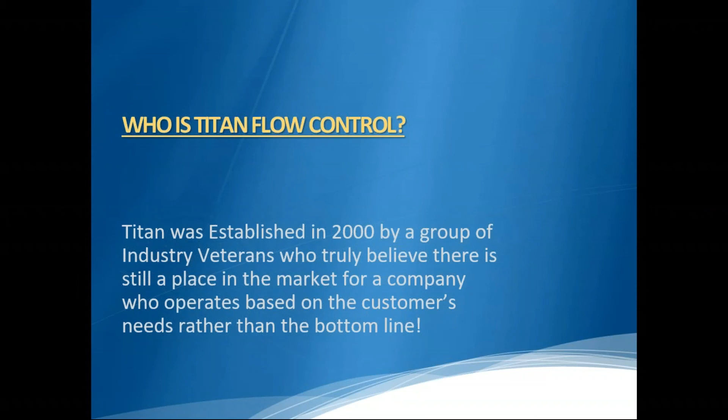So I kind of spoiled this one, but like I said, they're just a group of engineers and teams and service that have 20 plus years amongst them individually, 150 years combined, who decided to take a leap and go for their own road. They are considered a high-quality manufacturer. They do check valves, butterfly valves, pipeline strainers, fabricated products, and all sorts of fabricated and pipeline accessories. Their motto is they can fit and assist in any and all industries and markets, and where they can't, they can usually create the solution to get into that. So they're a good group to work with.

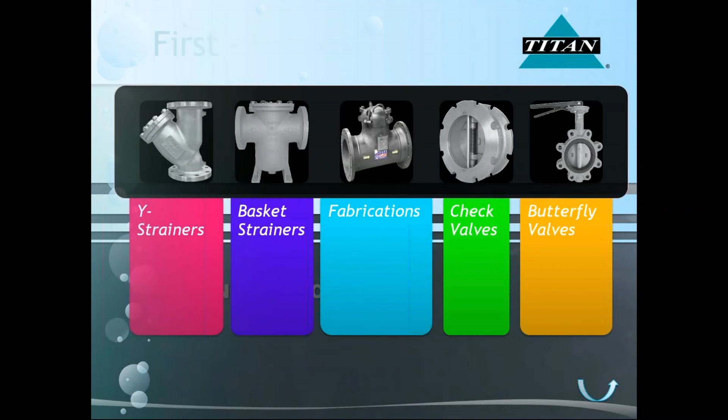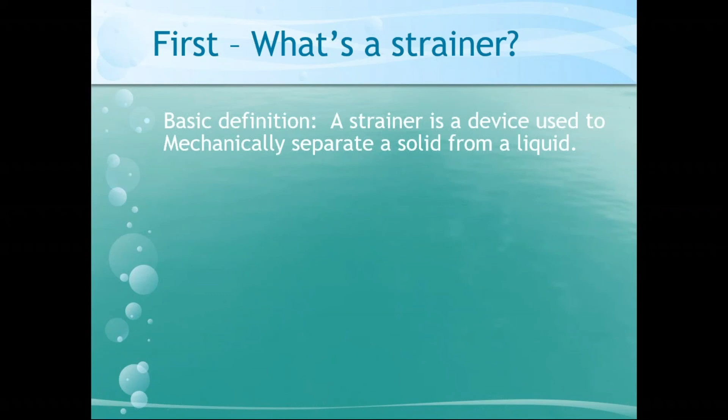That's their product line: Y strainers, basket, fab, check valves, and butterfly valves. We're going to start off with the basics. What is a strainer? A strainer, by basic definition, is a device used to mechanically separate a solid from a liquid. So you're catching particulate, debris matter, and containing it to a removable location. Now why this is important is, what's the difference between a strainer and a filter?

Titan does not do any sort of filtration, so they don't do filters. What it boils down to is the style of collection and the particulate size. Their cutoff point is 50 micron and larger is a strainer, which they can do with a Dutch weave and different kinds of baskets. Filters are 40 micron and smaller, and are a much different process of separating media from liquid. So Titan does not do filtration, and those lines clear themselves up when you see the design or the manufacturer. Sometimes there's a gray area, and we can offer a strainer with filtration capabilities, but they like to keep those ideas very separate because you're usually achieving a much different goal between straining and filtration.

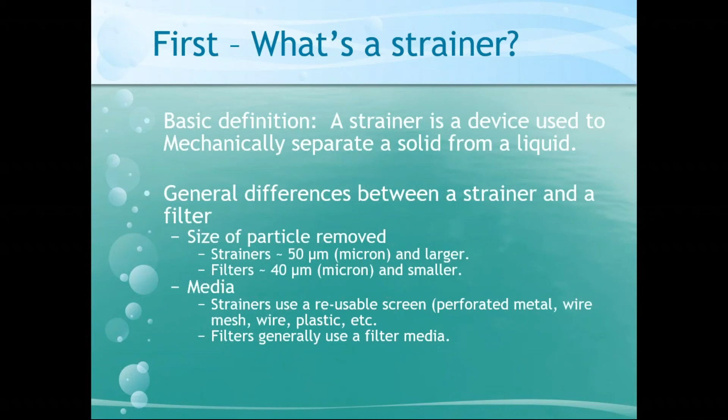So again, why so many types? Why so many types to strain media? What's different, what's unique? As we all know, unique solutions and problems all create themselves. So the straining market has evolved, so to speak, but also accommodated the many definitions.

The service solutions span anywhere from what you're trying to get out of the line, what space capabilities you have, what service time you have, what downtime capability you have. Each of these is a unique solution, a unique style, and carries its own benefits and limitations. So we're going to get a little bit of an overview on those.

One of the things on all strainers, they're all going to have a component where you can remove the straining component, the basket or the cone or whatever. So if you notice in all those pictures, it's some kind of flange or cover or something that...

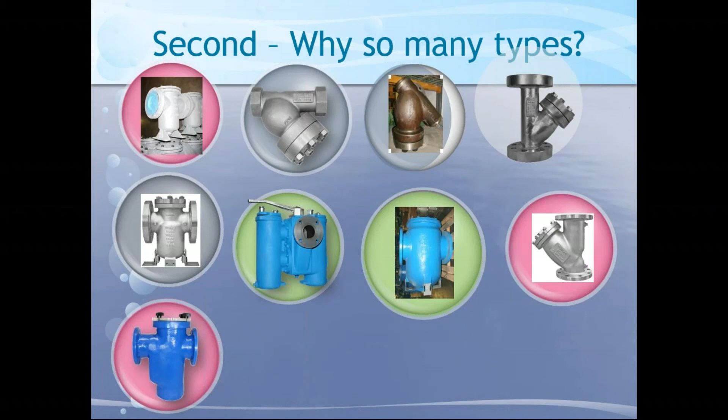So I'm going to talk about Y strainers. A Y strainer carries with it an installation benefit, one being horizontal or vertical installation, so it's more versatile in that department. It is serviced down, so it must point leg down, that's where the particulate heads down. You've got to catch it, or else it'll just keep flushing into your line. Then the blow down and the service is done from the downward position, so you take off the strainer and pull it out.

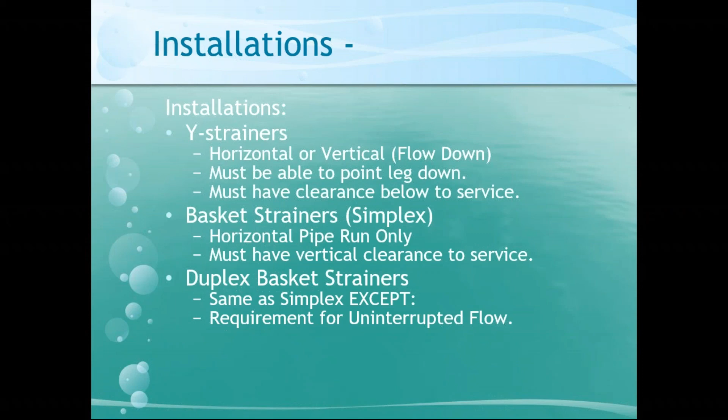Duplex strainers, I don't have one of those, but they're essentially the same as a simplex, only duo, and that's used when downtime is critical. You can shift gears and switch from one straining element to the next while the media is flowing. You have no downtime. You can service one basket, get it back in operation, and either go back to that basket or just switch them back and forth. No downtime, so that's what a duplex strainer is, just when downtime is critical. That's the application you're going to want to use.

The applications are limited, much like all pipe valve fittings, by pressure, temperature, and media. That's how we get to the most dialed-in design for what we're doing. Pressures and temperatures for the cast classes, like I said, it's 125 for the iron bodies, all the way up to 2,500 for the cast carbon and exotic. Well, no exotics for Y strainers.

Fabricated basket strainers are designed per application, and that's where they get a little flexibility. We can go up to, I believe, class 900 on fabricated basket strainers. Those are done in-house at Titan, they have a massive fabrication facility.

That's when, if you need a different design or a quick closing feature, they have standards, but they have fabricating capabilities, and they can only fabricate a simplex basket strainer, just because of the way the pipe is. For a cast unit, they just don't have the capabilities to do any modifications outside of an extra port or something like that.

So simplex is used when the alloys are more demanding, service conditions are more demanding, and the ANSI class is higher. That's where we get into the fabricated market, and that's what Titan is really hanging their hat on recently, investing significantly into their fabricated designs.

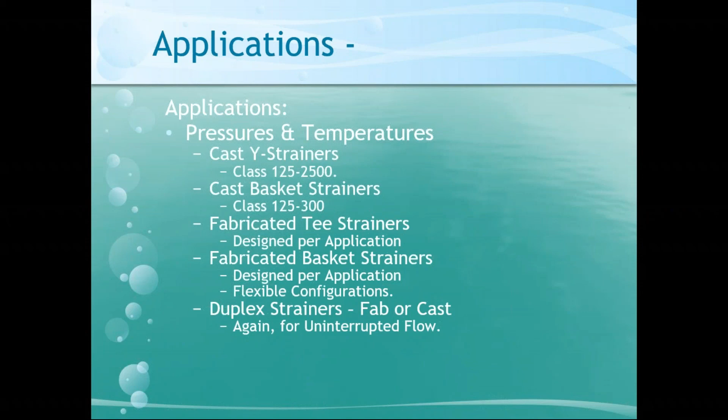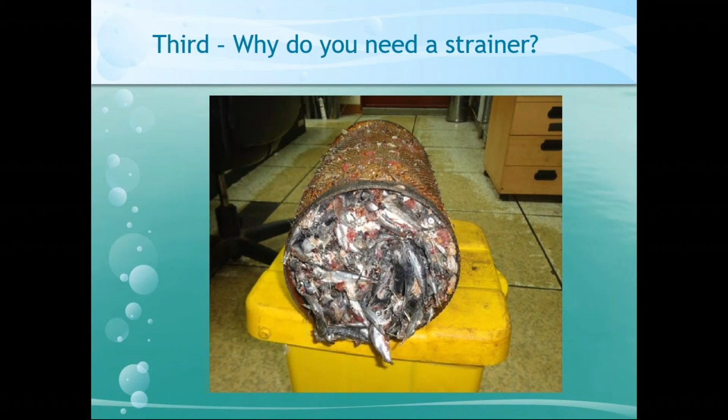Once you make that initial investment to get a straining element inside the line, you're kind of just looking at replacing the baskets and screens going forward. I think the insurance policy way to think about it, and it's the best description I've heard, is that it's a low-cost insurance policy for your line, protecting that much more valuable equipment.

So, cast strainers. I'm going to go past that one, this is more design. The product mix and size standard goes all the way down from 1/4 inch up to 36 inch. Your classic end connections are flanged, thread end, socket weld, butt weld, solder, and groove. The groove is the most recent, they just came out with that.

So it's in cast only right now, cast iron groove end, 125, 150, all the way up to 2,500. The materials are cast iron, ductile, carbon steel, stainless. That's where the Y strainer will stop, at stainless steel.

Now exotic alloys, that's where simplex kicks in - duplex stainless, super duplex, exotic alloys, chrome moly, alloy 20, Monel. A lot of that stuff they stock in-house, but once it becomes too exotic, it's sourced. But they have done it all and can do it all. They source it and keep it in-house.

Same with screens, they can do the same thing for temperature. They can do it all across the board. So exotic alloys is another situation where you'd switch to simplex when the alloys are more demanding.

We're going to switch to a simplex. Screen 25 micron, they're going to do that with a Dutch weave. It's a perforated screen with kind of a suit of armor, a little mesh lining weaved into it. 20 mesh, your standard mesh, all the way up to 1 inch perforated screen. Cover designs: bolted, clamp, T-bolt, and threaded.

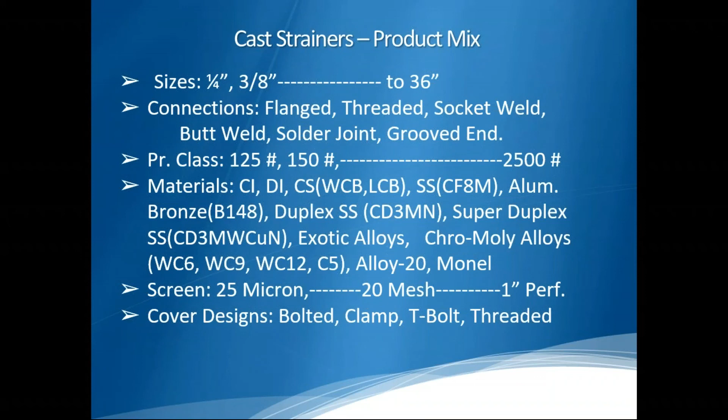All right, and now just a little more in depth on our cast - this is our size ranges. As the class increases, the size decreases, just based on service and material capability requirements.

They do have RTJ flanges, they can do that in-house, they can swap out flanges. And smaller size, half to 3 inch - socket weld, butt weld, thread-in - all standard stock items for Titan. So if you can't find it in one end, they can usually throw you an option and get it out there. And if it's capable and possible, they'll absolutely fabricate in-house to do what you need.

Titan is, hopefully I'll keep repeating this because it's true, Titan is the most user-friendly. You're talking to a person, you're getting a real answer, yes or no. That's one thing we love about Titan - you're talking to the fab designers in real time and they'll get you done. They try to make it as user-friendly as possible. They live by the 'customer is king' motto, and for the 7 years I've been working with them, they've never let me down on that. So hopefully that gets repeated.

Yeah, then those are for everybody. Okay, if you just talk about - I want to make sure. Yeah, no, it's enough for everybody. Okay, yeah, thank you. No problem.

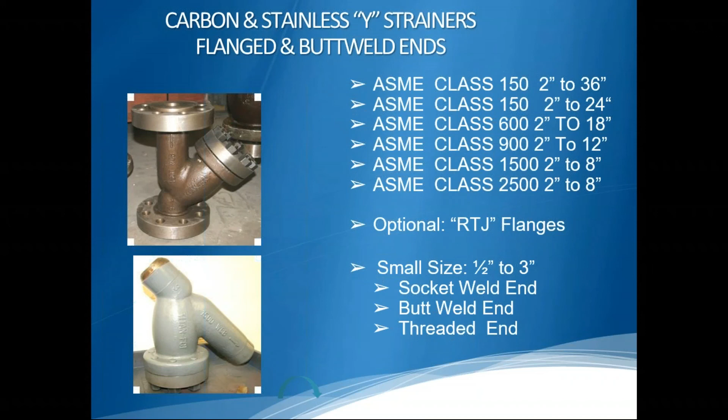Trevor, okay. All right, so moving on, they follow all the industry standards. They are getting a little bit into the bronze and aluminum bronze alloys. They do have a standard lead-free aluminum bronze now, so they're getting into that market.

So I'm going to take a 2-minute break. Yeah, I want to get a break - burrito break, go ahead. Burritos are the most focus for it, so I want you to be able to concentrate. Jay, you got to go get one now. You were talking about that. I'll grab that once.

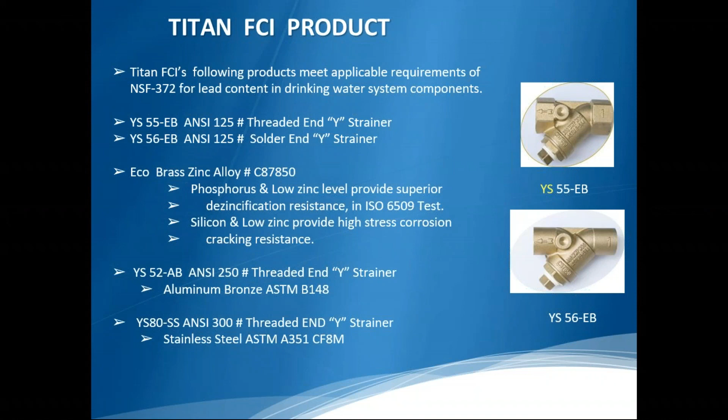But again, like we always say, with the price, connecting with labor - the significant amount of labor saved with those quick acting covers, especially the ones with davits. Single person maintenance goes a long way. Drainage vents are... oh, go ahead.

Oh yeah, so a davit wouldn't hold much purpose on one like this - that's a 4-inch. It kind of has with these. Anything over 4-inch will come standard with these. So both in - now when you're getting to a 10-inch simplex strainer, it probably sits about yay high with a cover about there. So what a davit would be is it mounts on the side here, and it just acts as a davit lifting arm.

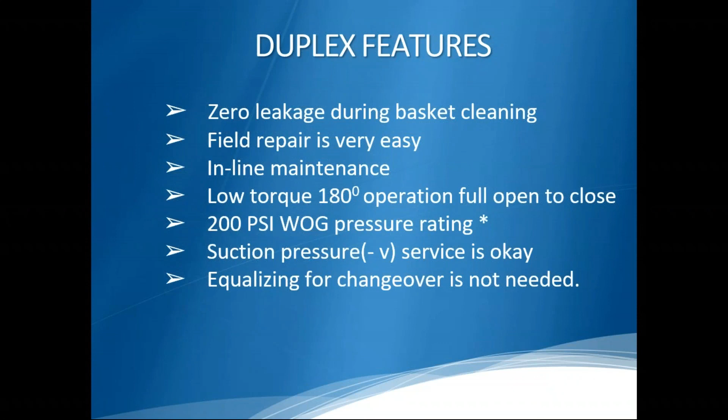And they kind of have a unique thing when they say, is there any expediting fees or something? They truly jump ball it to their crew. Does anyone want to stay tonight and get the expediting fee? And they do it. So if you've got a real unique one, or you've got something real hot that has to happen, it happens a lot with these.

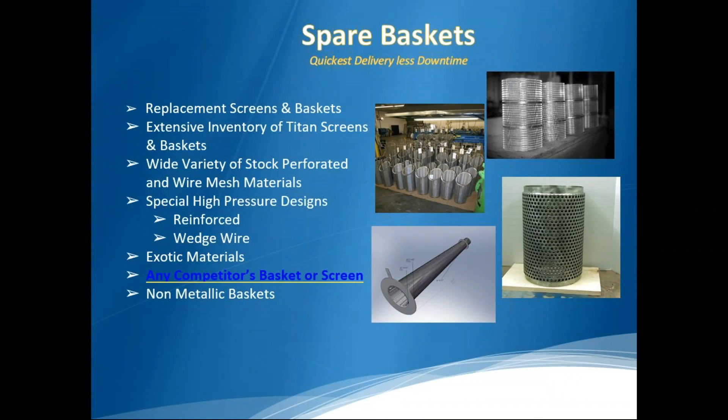So not necessarily a spare basket, just because they're ready. I mean, they're putting these in 500 times a day. They're ready for the screens and the straining elements. But it does happen if you need a Dutch weave or a full 3/16 stainless, you'll need something. But what we do get is the expediting fees a lot with this. These are done in-house. They also have an affiliate in Houston that does these. So these can come out real quick. That's where you'll see more of the expediting fees.

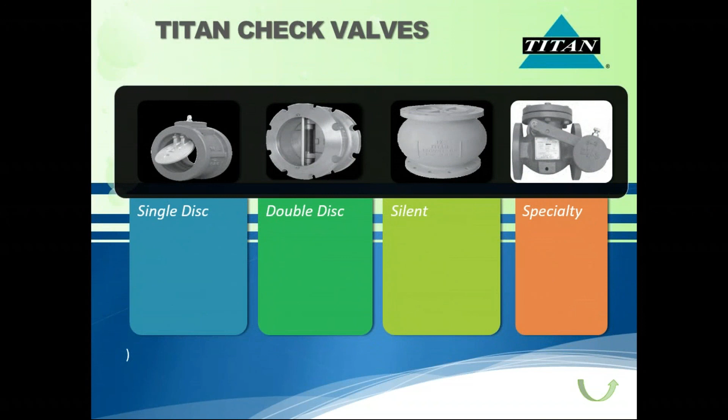All right, so now we're going to get into the check valve world. They've got a single disc design, double disc design, silent style, and then specialty. We'll give them a roll.

So single disc design, I don't have a single. I'm going to have a new kind of style one, but that's not a true single disc. So single disc design, biggest feature on that is lay length, slides right in, single disc. So your space is remarkably low on that. They offer this one in carbon and stainless. It's like the CS12. It's an extremely thin pattern, but it is full opening.

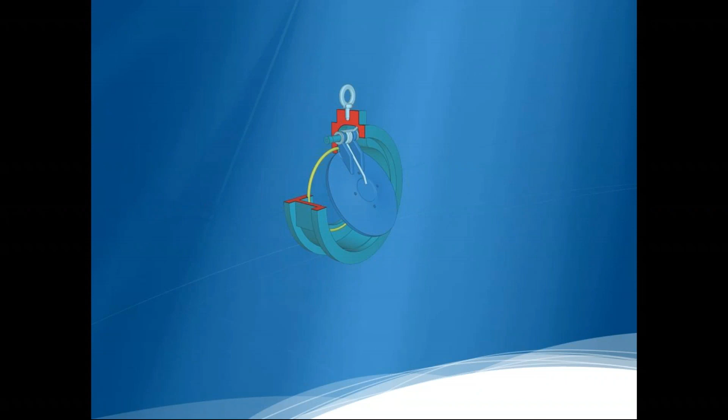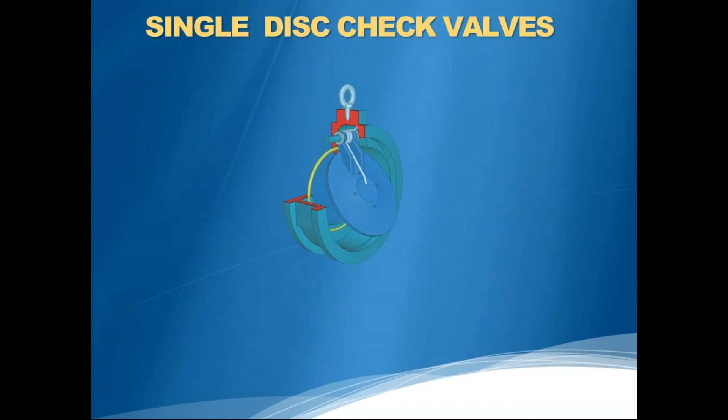And then they'll also have an iron. That's like a depiction of the iron body, and it's a little larger. It'll still have a smaller space design than this, but it kind of fits the same lay length. So they have an option for a true, I need the smallest valve to reduce my length, I need to replace an existing with a single disc. They kind of married both worlds on that, which is good. Advantages of a single disc style is that it is full opening. Give me a tap on that one.

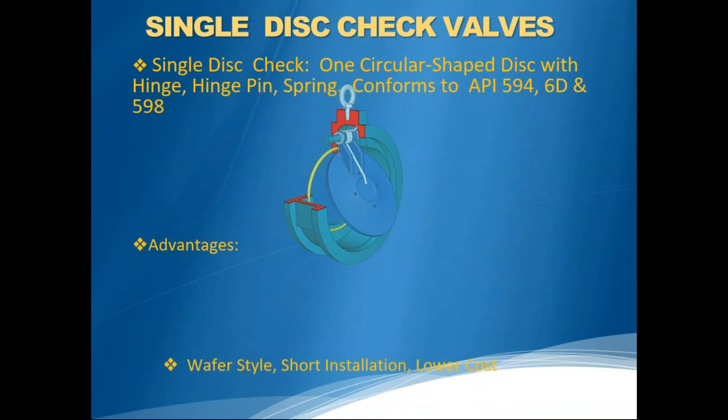So, single circular shape, hinge pin, conforms to API 594, 6D, and 598. It's kind of the lowest velocity design, they say. The cracking pressure with the spring makes it the easiest to pop in and out.

The disadvantage of this would be just the flap. It's a classic flapper, so if it's low pressure and constant, you'll get the most chatter on this one, so you need to assess the flow velocity because oscillations can exist.

Inline maintenance is not possible. With that design being a single unit, it can't peek in, it can become foul, and you've got to take it out. Most of the time you're just going to replace it. So it's low cost, low material, but with that comes limitations, which is serviceability.

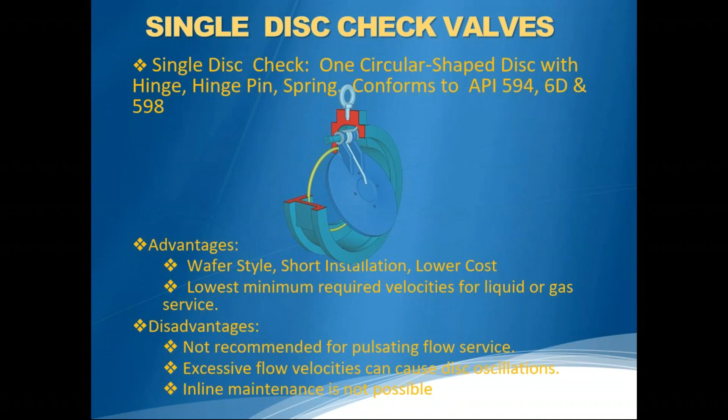One more step on that. Then there's the dual disc design, what they call the double disc. This is probably, I don't want to use the word common, but if there was a common one, this would be it. It also conforms to 598, and it's a wafer design, so short installation, easy to install.

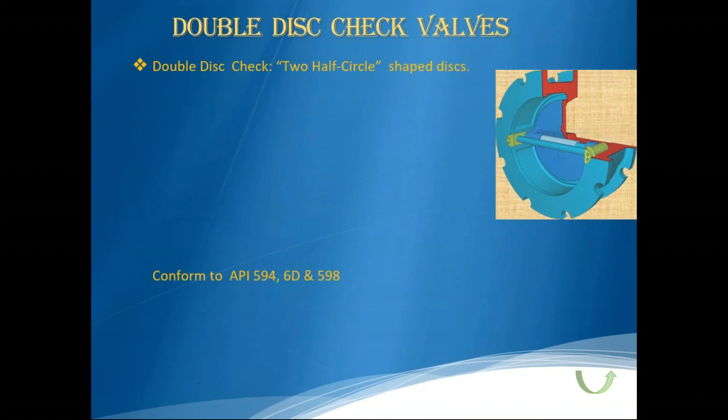You know, with wafers right in. But the disadvantage of this, you'll also find the chatter. With all check valves, you're limited on sizing from your pump, so the chatter is whether you're going to get the most. It has a higher cracking pressure. Standard on these is half pound, and it goes in and out.

But one of the bigger limitations on this is the fact that it does have quite a bit of interference with the line. So if you've got heavy debris in your line, you can use a strainer - it is going to catch. You don't want to use it for slurries, wastewater, anything with heavy traffic, because this will become foul very, very easily. So that's the main thing to watch out for.

Same thing with all check valves or the flapper design is the oscillation. If you have high oscillation in the line, it's going to be a loud chattering check, so just keep an eye out for that.

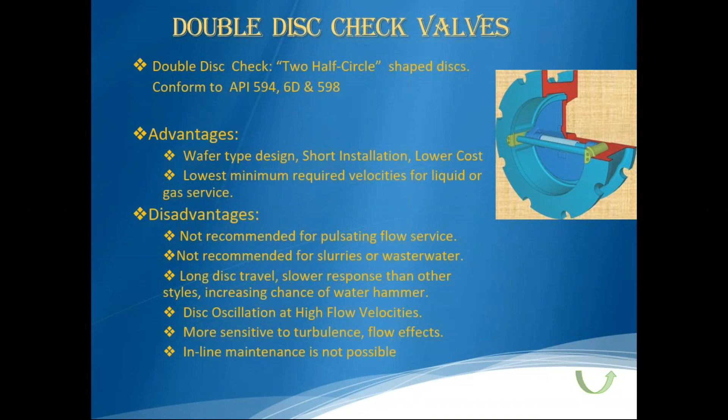And then center guided silent check valves. This is center guided - not the globe style, but it is a center guided design. Single spring assist, kind of in and out, so it's a more uniform flow. These will create a more uniform flow - water can't find kind of a secret path and then abuse one side or the other. So it's a single disc design with uniform flow.

The globe design has straightening vanes, so it'll reduce turbulence in the line. That's where these will come in - if turbulence is higher, you want to look for a silent style single disc design. Keeps a more orderly flow.

You're going to run into the same limitations as any inline check valve of this nature - debris will foul up your line immediately. So just keep it clean with a strainer, but this will reduce turbulence and chatter. They have two designs, one of which is a bigger globe style with straightening vanes, which is a true solution for a heavy turbulent line, for use in pumps and high slurries and anything that'll foul up the line.

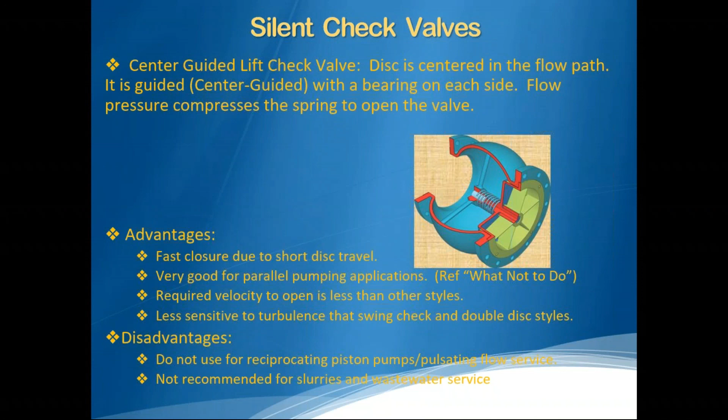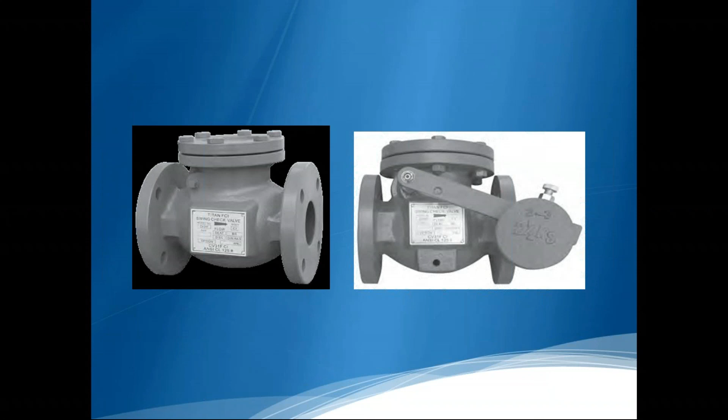Specialty check valve - this is a lever and weight design they offer, or just your standard inline check valve. This is when maintenance is important, so you get inline serviceability. It is a top entry design - you lift it up, defoul the disc, and get back on your way.

Limitations are the same as the single disc design - it will chatter, no turbulence, not too close to a pump. But this one is ideal if longevity and serviceability are important. If you do have a heavy debris line, you can take a peek in, defoul it, get a replacement disc for it, and kind of move about your merry way.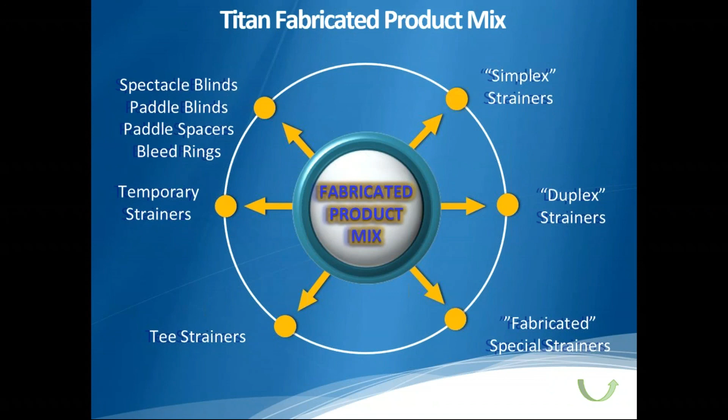So now we'll get into these. We're sending you guys a literature box — it's in the works, and it'll have nice breakdowns of all this stuff, ordering codes, and general ideas on what they can do. This covers all their capabilities, and it's increasing every day.

I won't go through all these, but like I was talking about, they've got plasma cutters, water jet cutters, plate shears, power saws. They invest heavily and constantly in the fabrication design, so it is a beautiful facility.

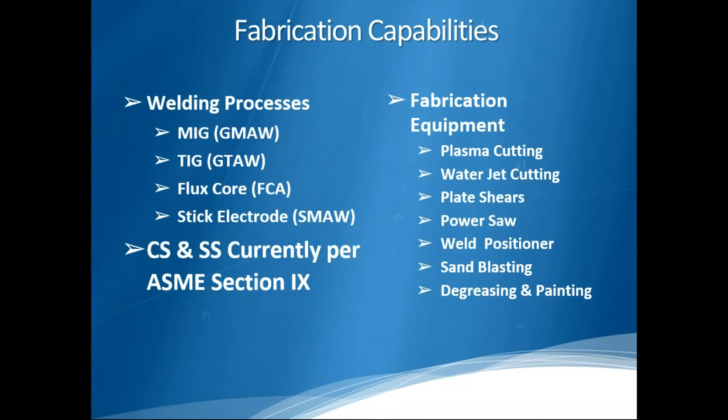If you lose a bid because a U-stamp was required — kind of like API 6D on valves, some people conform to or test to, while others have a true monogram — they used to just conform to the U-stamp, but now they can do it in-house, including radiography. They really listen, and it's tangible: if you miss a bid on a spec, they don't take it lightly, they look to do it in-house.

So that's where all the testing, they can do it in-house. They've got in-house testing facilities, so they can hydro test real time inside their facility. They've also got a paint shop, with painting standards and customer specifications. If there's a specific paint spec, you can physically send them the paint, or provide them with resources to source the specific things, and they can do that.

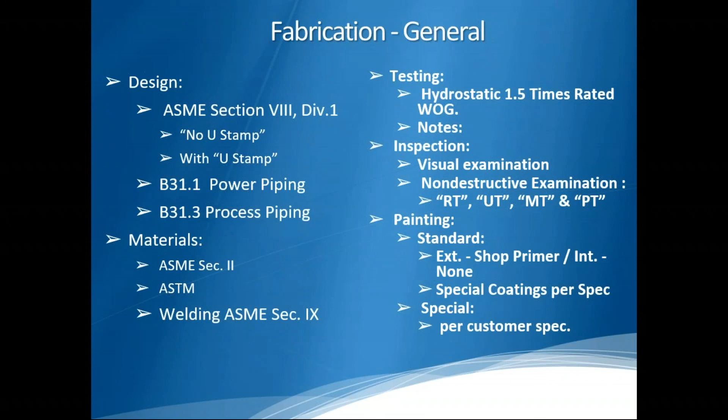All right, so just a breakdown of their fabricated product mix. The size range is the same, but the products they can go up to 36 inches differs. When we're talking fabricated strainers, it's simplex only — there's no fabrication available for a duplex strainer, but they can do 2 to 36 inches. They can in-house do all the end connections, flange, butt weld, 150 to 900, which is where the limitations of off-the-shelf cast, class 300 to 900, come in. 20 mesh, 1 perf, that's the same.

Cover designs — this is where you can do any cover to any design. They can modify a strainer or build it from the ground up. They can build a 100% domestic simplex strainer, sourcing all domestic materials. A lot of the castings are import, but they can conform to Buy American, or do 100% domestic simplex strainers. That has saved us quite a few times. And there's a different quick opening design — there will be a picture of that in a slide or two.

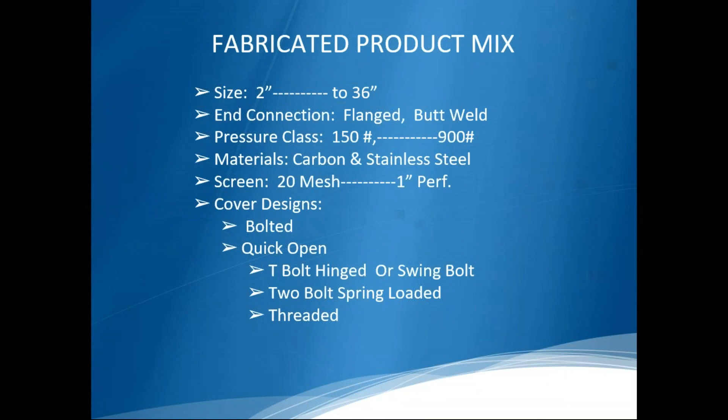Some of that is accommodated by having a knob lever, which will open all of them simultaneously. So like I said, when we say limitation, it's mostly an out-of-the-box limitation. We can accommodate and facilitate up to a true ANSI rating if needed, but it costs a lot more money — and if it's not needed, we just make sure to note it with an asterisk.

200-pound pressure rate, that's a nice example — that's their fab, completely built in-house. When I was there one time, I saw some 24-inch units made to the customer spec. So any engineering deviations, any design, they can do it.

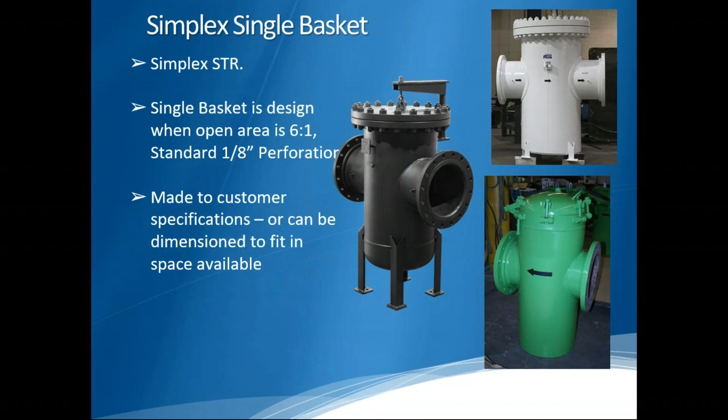Multi-basket design. Sometimes this can be done as a simplex off the shelf, and they can just modify it.

Why multi-basket design? It increases the open area and increases the flow, so water can freely flow through all of these chambers, depending on the engineering breakdown and the pressure drop. If calculated pressure drop is too high on a simplex design, just because of the amount of open area the water can travel through, they came up with a multi-basket design, which allows for higher flow of water and can decrease that pressure drop.

When we say pressure drop, they've got a very basic breakdown on their website where you put in basic info, what size, what straining element, and the media, and do a quick calculation. It'll tell you 2 pounds or lower if you're good to go. If you see a spike in that, that's where we might want to get engineering in to truly look at some viscosity, but a multi-basket design is usually a good method for alleviating pressure drop.

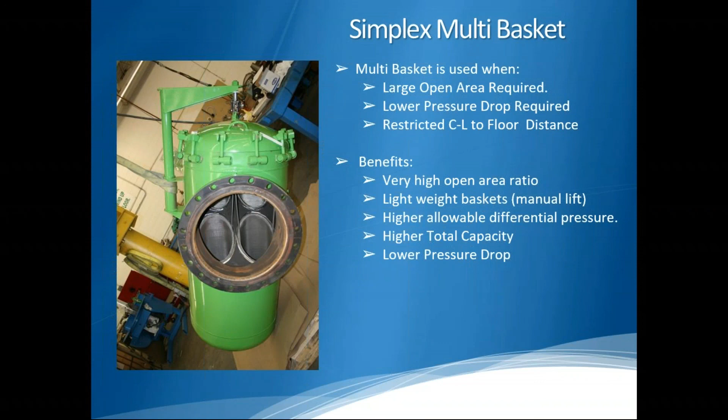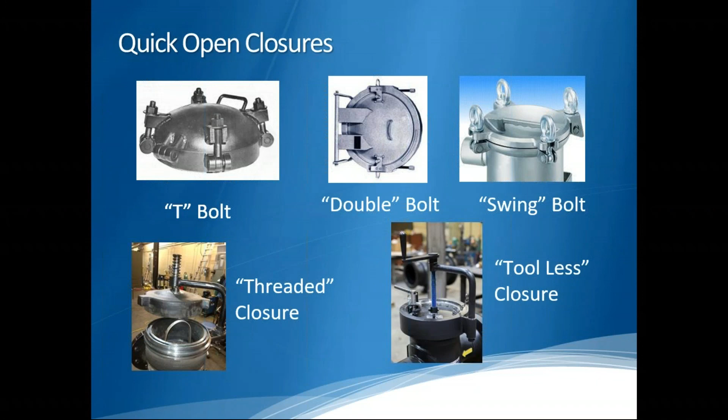This is a good example of what we've been talking about over and over—it's just a different style of closing. This is their fab facility, so they can modify it. Dead horse at this point, but they don't stop—they know, and then get into the fab T design.

These are more engineering driven: bolted cover, quick opening, flanged in with a tub basket, and then W basket. That's where they'll give you a design on straining style, and usually that's all dictated by the engineering design.

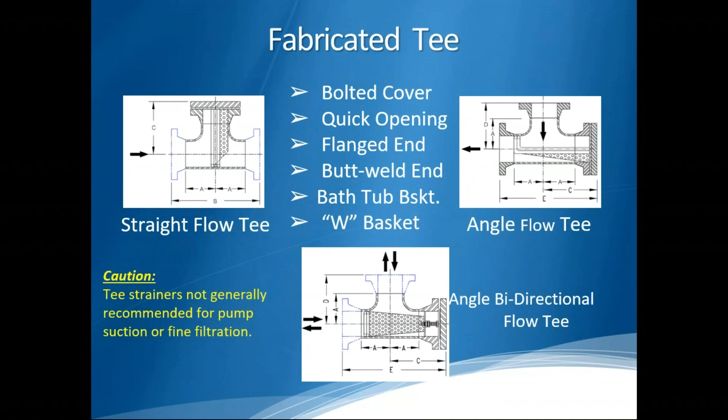With fab Ts, we're always kind of replacing someone else's, and they've done well with it. I've never organically specified a fab T—they kind of come to us or come to Titan, but they can do it, and they go by the design standards.

These are their fabricated duplex—these are butterflies. They've got a quad ball on the lower end, but I think it's 8 inch and above they move to a butterfly design, depending on the material, either an iron body butterfly or a high performance butterfly if needed. This is a completely built, ground up, 100% domestic valve. So they will do that.

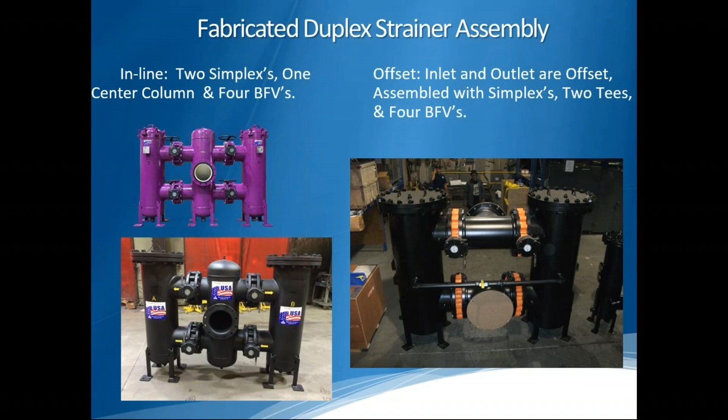And then temp strainers—that's the most common, the witch's hat or pilgrim's hat, flat style, spectacle blinds, spacer rings, bleed rings. We've got a nice catalog we're sending on this.

They can do 150 to 1500 on all sizes. It's in-house made. Usual lead time on this is 4 to 5 business days. Expediting is available, but that's pending the available labor, and it's usually their quick thing is double the price for half the lead, simply because they're truly keeping the team extra to get something out next day. It's worked wonders before if someone's got to have it the next day.

So these are used for temporary installs, catching the startup, just in and out. Like I said, we've got good literature on that. These are all done in-house—these are considered domestic because they fabricate these in-house.

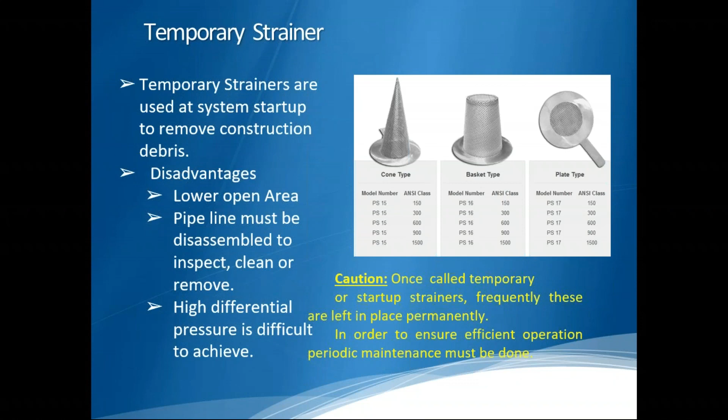Well, it all depends. All fabrication is considered domestic just because it's done there. They fabricate all of their baskets and screens in-house, but the castings are Chinese. But Titan can conform to Buy American 51% on just about everything, simply because if we needed to make this Buy American compliant, there's domestic—we can do NACE certified domestic trim. The gaskets are made in-house, the basket's made in-house, the testing is done in-house, so the labor and parts get there.

And they have a nice little certification letter. I don't know of anything that's exempt from that we can't do, just for the simple fact that they can fabricate all of the internals and test in-house. So the labor usually is what puts it over that 51% mark.

And then on the true 100% designs, they can do that as well—these would qualify as 100%, especially sourced. If it gets down to the nitty-gritty on a true 100%, they will have to do domestic sourcing of carbon and stainless steel, which they can do, but they do have carbon and stainless blinds that are import.

So with all kind of the Buy American stuff, they can do it—you just got to know exactly which one we're doing. The 51% one is never an issue, just because of the amount of in-house capabilities they have. So spec blinds, bleed rings, like I said, they can do it all.

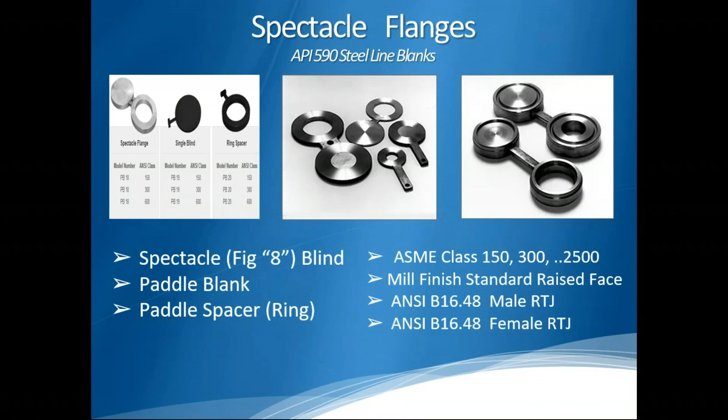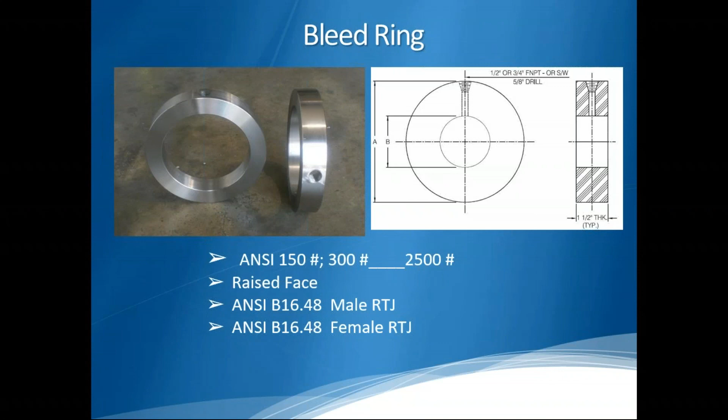One down, so go ahead on. The bleed rings go 150, 300 all the way up to the max. Again, just by design, they'll have you sign off. They'll give you a drawing and you'll sign it.

So this is an overview of their capabilities. They're up to speed with all the engineering work: CAD, BIM, 3D, 2D engineering, webinar, live testing, video, hydro testing with video. So this is all the standard codes. They meet all the codes and applicable requirements.

You can do in-house witness, they accommodate all of that. So any and all spec requirements in that world, they've done a very good job of never saying no because of a design or engineering specification.

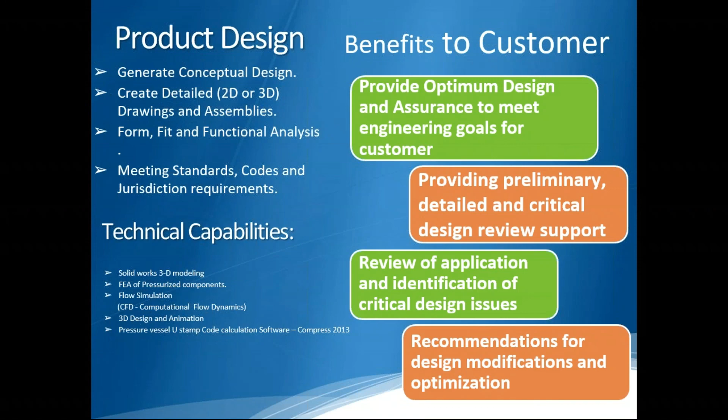And training, their trainings are second to none. I don't know if anyone's been able to do it. It's in Lumberton, North Carolina. They hold 2 a year, very, very beneficial. I believe they just had one recently. The next one is usually in September or early October.

So we'll keep everybody aware of those dates. It's very hands-on. You'll make a basket, you'll make a strainer. You'll completely assemble and disassemble a simplex strainer. You'll change out the springs - it's extremely hands-on and very, very fun.

Like I said, it's a good group. You're going to meet all the owners and the presidents, the ones kind of running the show. It's a good time - they kind of shortened it, which is nice.

It used to be 3.5 days, kind of got it down to 2, which is good. As fun as it was, it was kind of a hassle, but now they've made it more user-friendly - you can sneak out on a Monday and be back to work on Wednesday.

So we'll let you guys know whenever that comes - the next one. If anyone would like to go, it's well worth the time, extremely hands-on. To see that fabrication facility in person, you realize why I won't shut up about it. So we'll keep you in mind on that.

And then this kind of jumps back to reinforced strainers. They can do fiberglass reinforced strainers. Again, I'm harping on a dead point here, but any service is not off limits for Titan. So they can do it - they can modify some of their standard designs to have fiberglass reinforcement to maintain those heavy oxide slurries and all that.

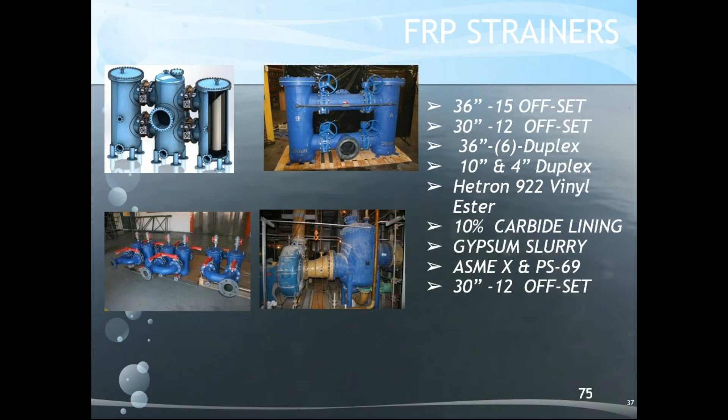And the differential pressure gauge - like I said, everything is standard with it. It comes with a 1/4 inch. The reason being is that the most telltale way to know when you need to change your screen is the inlet, outlet, pressure differential - that you're clogged. Most people want to maintain under 5. They say if you're ever going over 20 pounds differential pressure, you're putting too much strain on everything.

But the leeway is up to the engineers, it's up to the line, it's up to the flow. They're not going to tell you what you should do, but at a certain point if you're running it, you're redlining it. So they just have a good indicating way of when and why you should clean it, and you'll get some good life out of a basket depending on the material.

Most times you just scrape it. You probably want to change it every 2 or 3 times to get a fresh basket. The biggest thing to remember when maintaining and servicing is the gasket, though. They do all those in-house.

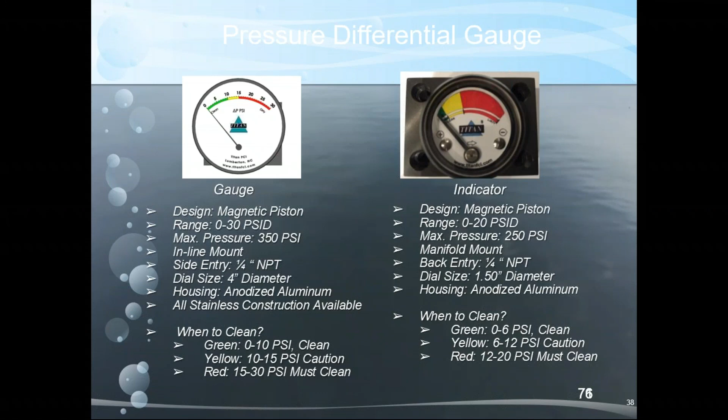They have hundreds of them on hand, but just know that anytime you're inspecting and you're popping it open, you're going to want to replace the basket and the gasket. So keep that in mind - that's where sometimes I thought we got 3 uses out of it, not on the gasket.

They can follow NACE certification, though not all of them come standard NACE, so keep that in mind. They do need to change out some of the trim and usually upgrade to a full 316 stainless basket as opposed to a 304 stainless, which is used on the carbon model, so they can conform to NACE.

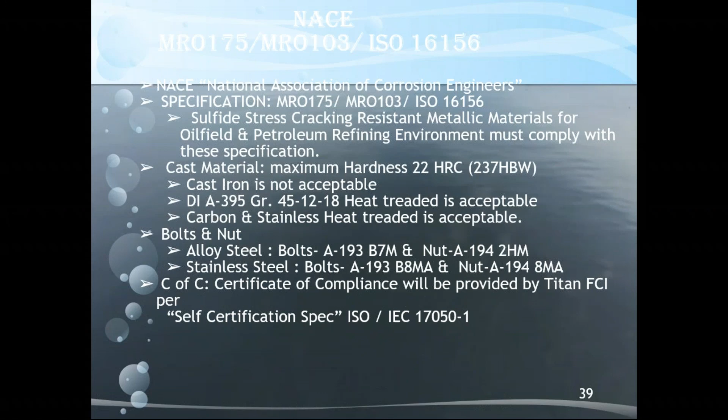It's really just about the labor. What's the labor adder? I think for a large strainer to conform to NACE it's a flat $50 charge, so they don't get greedy with any modifications. It's a true look at labor, and then they move on without hanging it up.

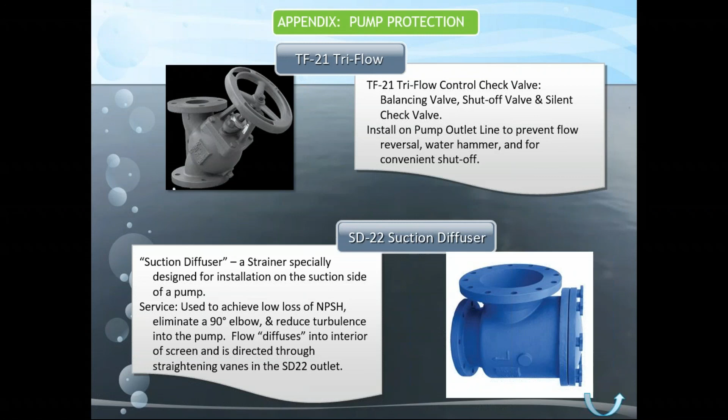They've got a tri-flow, so they've got pump protection products and suction diffusers. These are on the shelf, and we've had some decent success with those. Keep that in mind if you ever run into a tri-flow or suction diffuser—they've got them stocked up to 12 inches, so this comes in quite a bit.

Some people, like for HVAC refrigeration—Trane and Johnson, those guys—have a specific O-ring design. If you run into a situation where you're missing that, you're not seating the O-ring properly, so that's another thing to keep in mind. If someone sends a picture asking for one of these and you see a chewed-up handle, they're just asking for a gasket, or asking if they can scrape or clean it—we've got to get a new one on that. That's just a little tip.